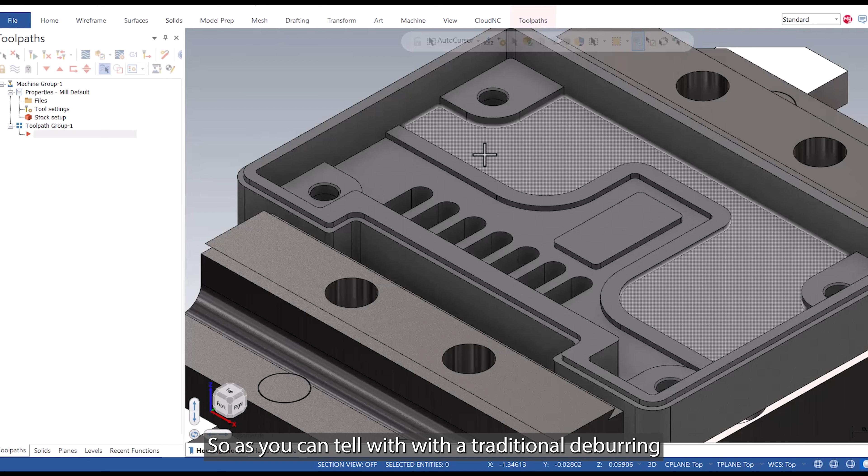So let's dive into the part and take a look at it. As you can see, there's some really sharp edges that we need to deburr, and they're also close to these faces. So as you can tell with a traditional deburring knife, you're going to probably scratch these edges. And there are also a lot of edges to select. Now you could do this with contour, but as you can see, there's a lot of chaining involved as well.

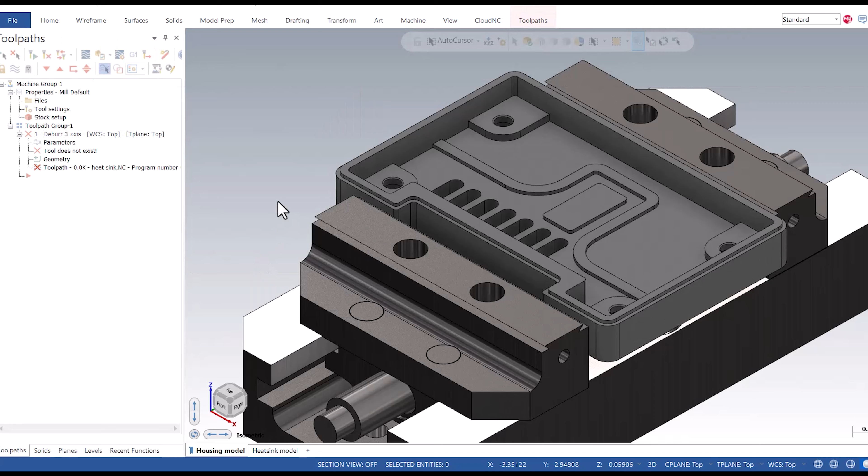So let's look at the toolpath. The toolpath lives under the 3D gallery, and in the 3D gallery at the bottom you'll see a Deburr 3-axis toolpath. It's simple to use, it supports ball end mills, it supports lollipop cutters, and it does support some taper mills. We're going to concentrate here with a ball end mill and quickly show you how to deburr this part.

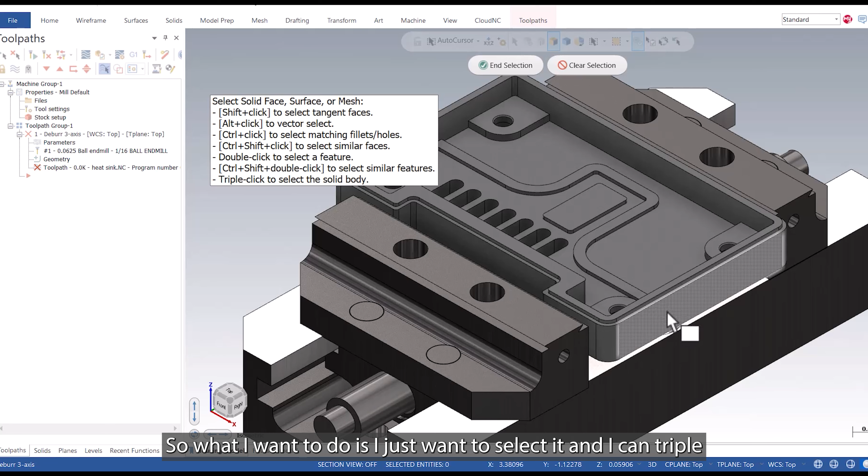Now the machining geometry is my part, so what I want to do is I just want to select it, and I can triple click on the part, and it will auto detect all the sharp edges. Now I can come in here and use a user define and chain the edges that I want, but I'm going to leave that with auto detect.

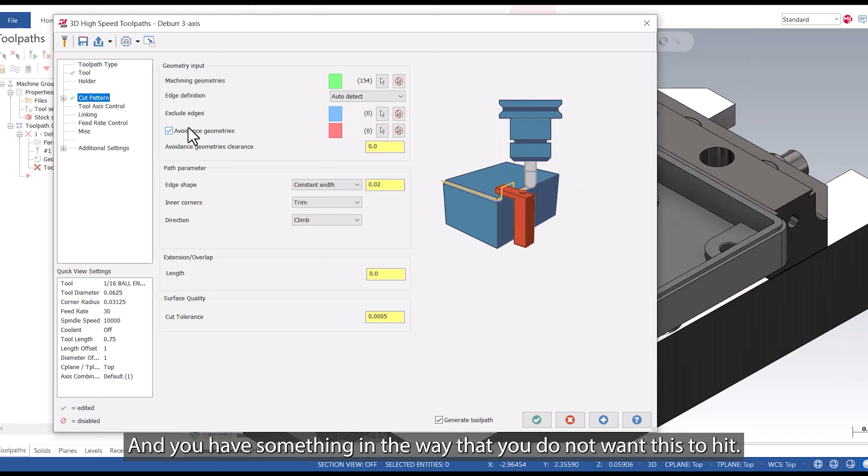We can also apply avoidance geometry. So if you have a clamp, you have fixturing, you have something in the way that you do not want this to hit, obviously it's all gouge checked and it can gouge check against the geometries. All I really need to do is tell it how much do I want to break those edges. I'll put in 20 thou so we can see it, but probably 5 thousandths would be enough for this part.

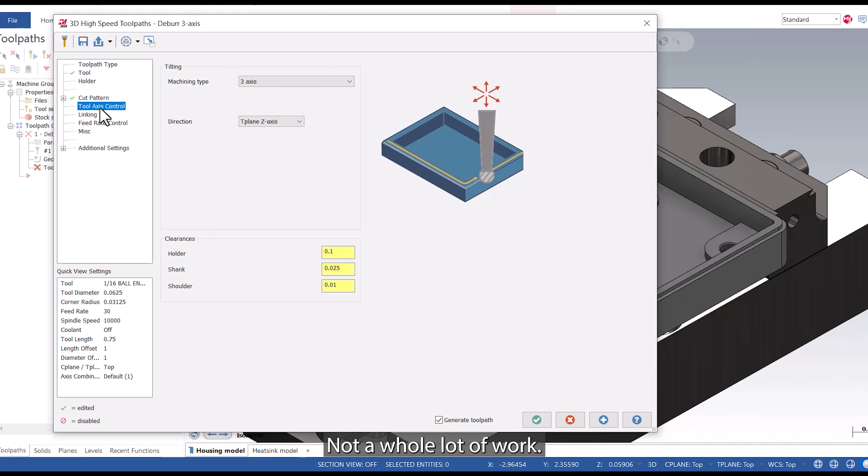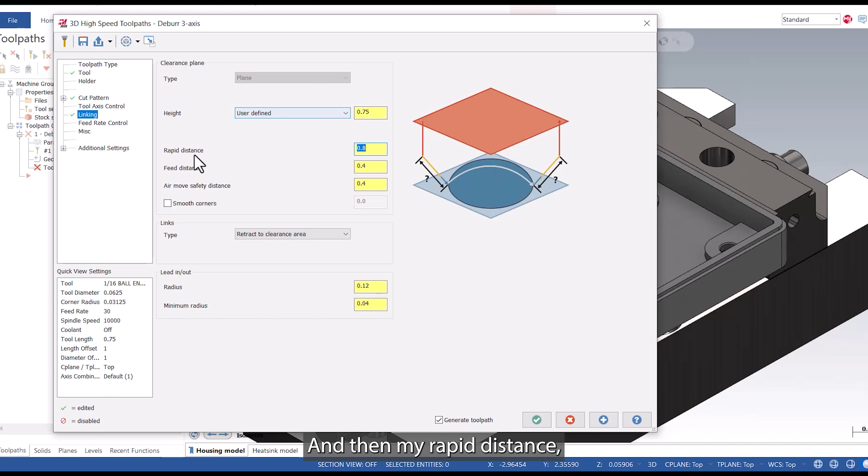Tool axis control, not a whole lot of work. It's a 3-axis machine. It's a vertical machine, so my tool plane's coming from the Z axis. Pretty standard linking. I'm just going to tell it to rapid above and retract by 3/4 of an inch. And then my rapid distance, maybe a 1/2 inch, but just some standard stuff there. And that's about all the input that you need to give it.

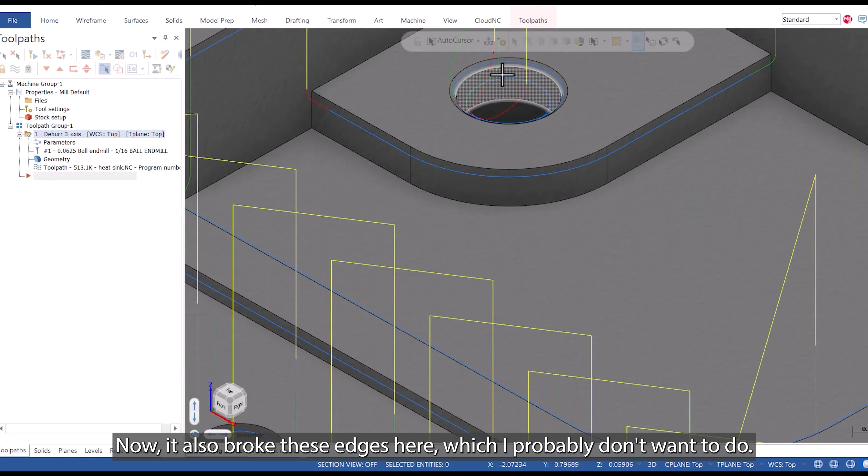So when I hit the check mark, you can see that it quickly dissected the part and broke all of the edges. Now it also broke these edges here, which I probably don't want to do. So let me just go back into the parameters, and I'll show you here under the cut pattern that I can exclude certain edges.

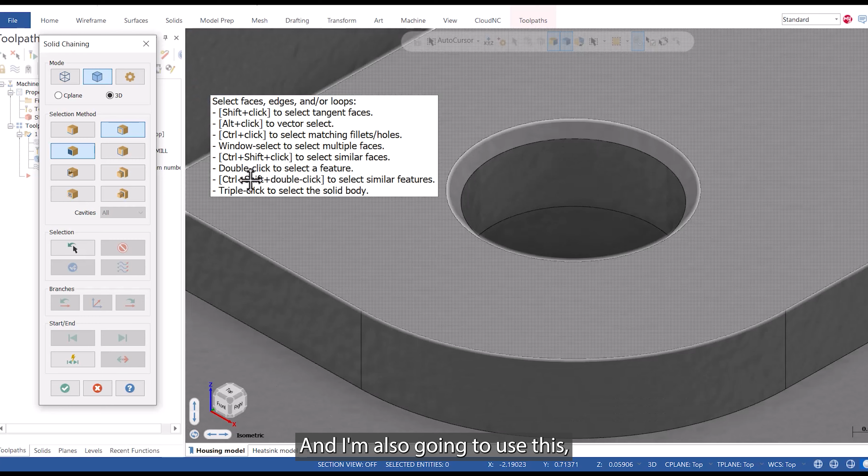Now, I'm going to exclude all of the edges that are on those chamfers. And I'm also going to use this control click, and as you can see, it just grabs all of those edges on those similar faces. And so we're excluding those edges, bring it back, and as you can see, it excluded those edges.

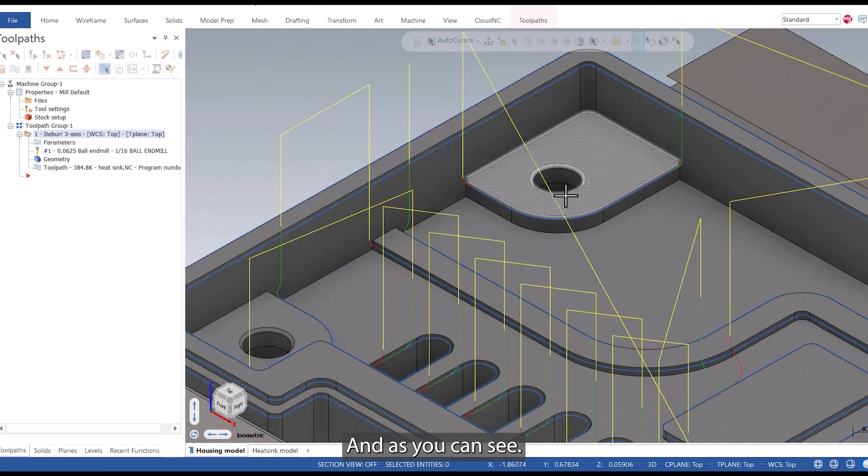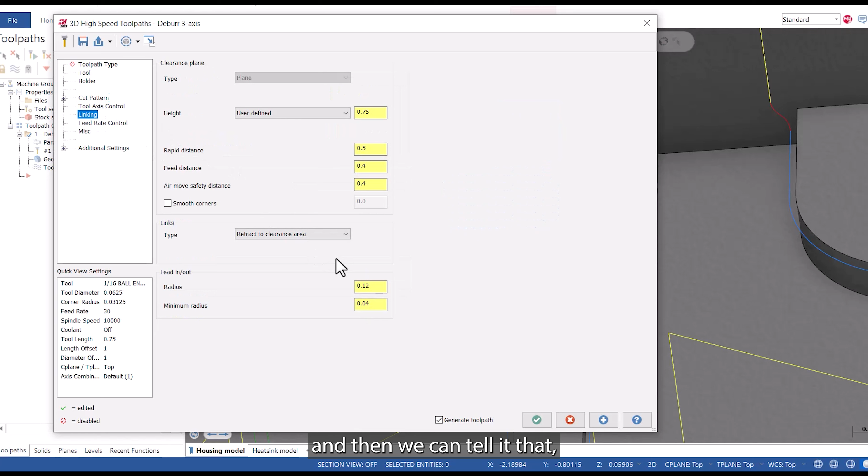Also, there is some default lead in and lead out, and you can see that it's a standard, looks like an 1/8 inch radius here. Now, we can tighten that up. Not a whole lot to it. We can come back in here in our linking, and then we can tell it that I don't want more than, let's say, 60 thou, and I'm okay with a radius as small as 20.

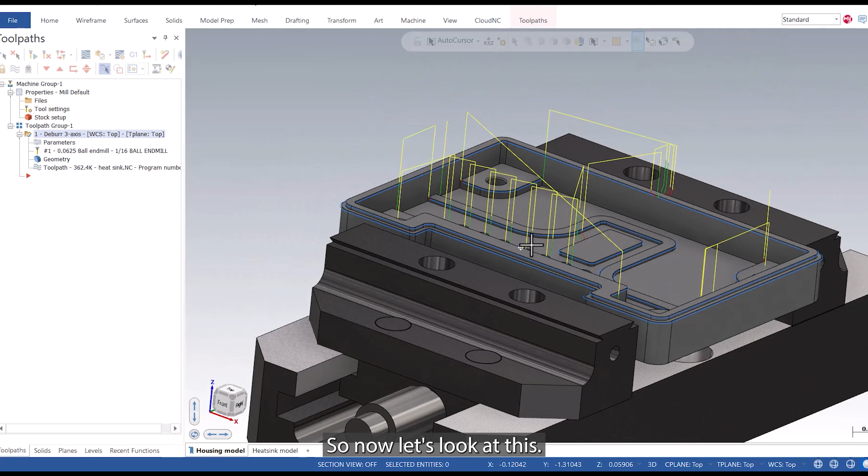And what that'll do is that'll tighten up these edges and probably get the tool a little further down the edge. Now, of course, at some point, the tool's going to hit this wall, and as you can see, it's completely gouge checked. So now let's look at this toolpath in motion. Really quick, really simple,

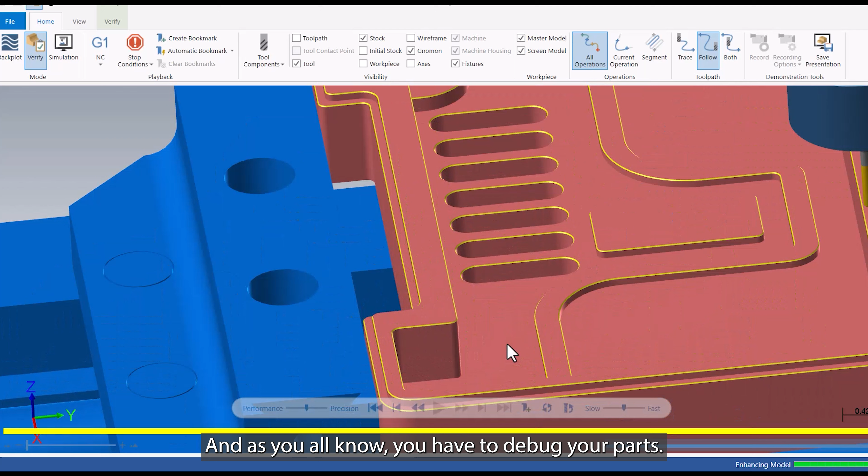completely gouge free. And as you all know, you have to deburr your parts. Let's have the machine do it. So much easier, so much safer. You're not taking the risk of scratching or gouging yourself, right? That's something we want to stay away from.

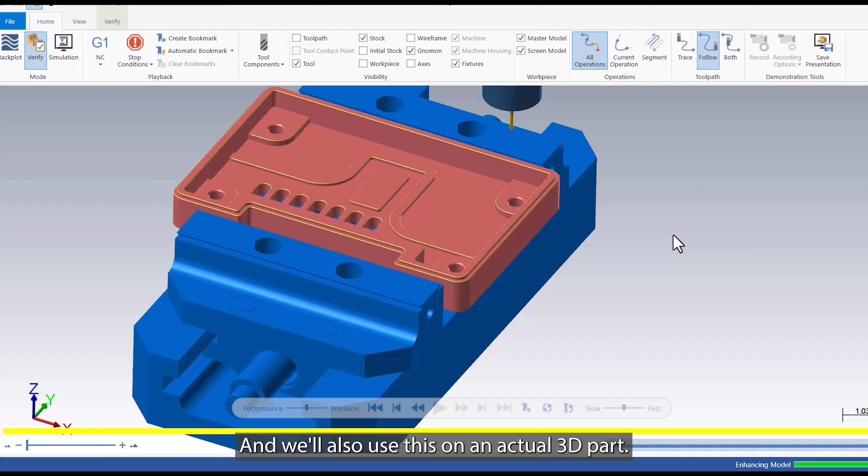So in the next video, we're going to discuss the same toolpath, but we'll do some undercuts with a lollipop cutter, and we'll also use this on an actual 3D part.